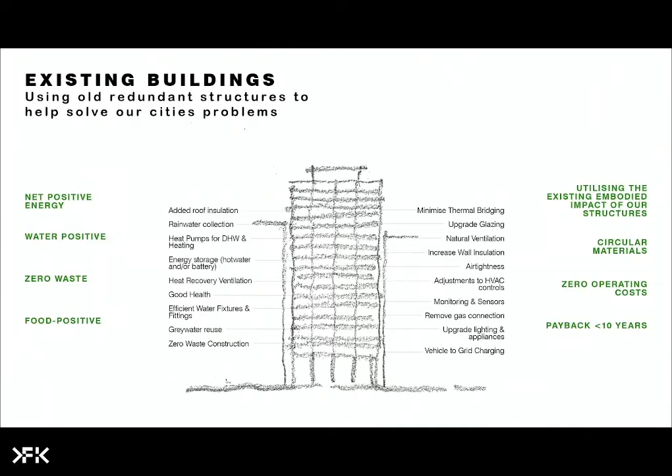This is in Richmond, and it was a silo, 4 silos. But in Richmond, you could not build over 2 stories, and this silo was 7 stories. So by just adding on to it, we all of a sudden got a 7-story building. And we got very interesting apartments.

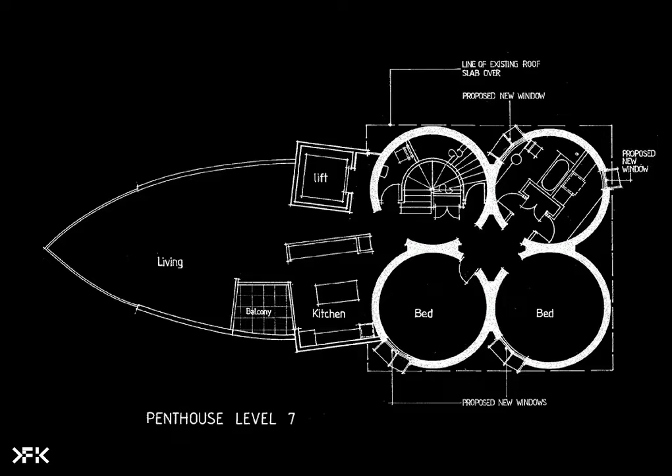It was done by taking the silo forms and adding the eyeball shape onto it, and extruding it up, and it was shaped like this so that the rear neighbours could still get sight lines. We didn't go beyond, even though the site was bigger.

And there it is, and it's a kind of interesting thing to come across, but it's using what we have. And if it had been pulled down and another building put there, there would have been a lost opportunity of memory, a lost opportunity of sculpture, and a lost opportunity of a sustainable approach.

And another one, this is a building that was the old Postal Hall Telephone Exchange in the city of Melbourne, the first taller building that was built after the war. They built them strong in those days.

And so Nonda again bought this in syndication, and we went ahead and put a building on top, 7 stories, steel, lighter weight, and turned it into residential. So offices became residential. There was retail brought down into the Postal Hall. This is in the city centre on the corner of Little Bourke and Russell Street.

And all of a sudden, and I know we had a discussion today over lunch about bringing residential into London, and I was just overwhelmed by all the realities of why that's very difficult to do. But luckily in Melbourne, we have the space and place and opportunity to convert, to get people into the city, and it's quite a different paradigm.

Melbourne closed down. London is such a force. It's got all of that retail and interest and pageantry at ground level. We didn't have that. We don't have that population. We don't have that demand.

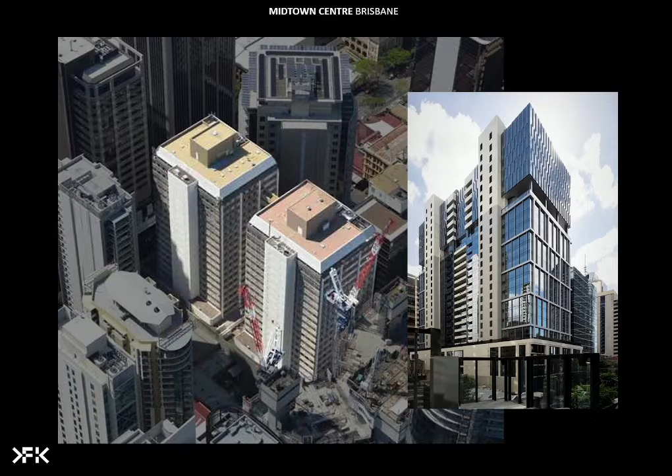We just took everything off the towers and stripped out the ceilings, reclad it with a very efficient shaded glazing system, and filled the void between the two with a mixed mode zipper space, creating from two 900 square metre floor plates, one 2,000 square metre floor plate. So that was a very flexible space, keeping all of that structure, recladding it, resurfacing it floor to floor, mixed mode with ventilation through the building.

And I think we just won a sustainability award through our institute for this building. It's quite a rare thing. I can't think of any other building in the world that's been joined to make one building. But it needs the commitment of clients.

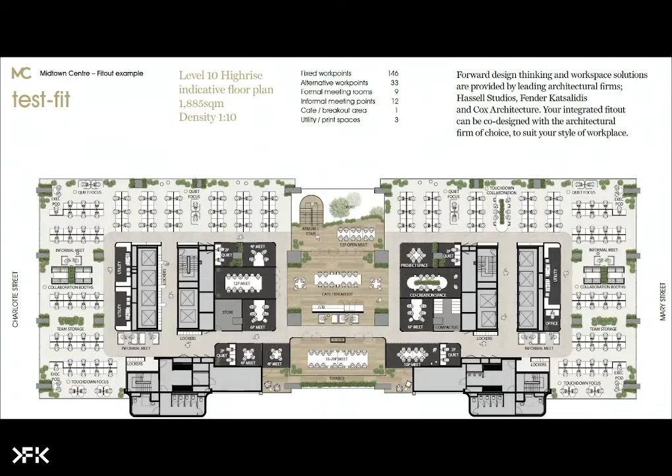So here's a test fit floor. There's one building, and this piece in the middle that is a meeting place, where you can have interfloor connections without having to go to the elevators and all of that. So then there's next generation workspace. And of course, we couldn't resist but put another few floors on top.

Increasing the workability of that piece in the city of Brisbane, retaining the heritage site, creating through-block links, creating gardens in the sky. I feel a bit, I've had to rush through these because there's quite a bit, but each of these projects have got so many aspects.

It is about the livability of buildings, but all of these positives in terms of reusing buildings, it's just something that you can't ignore. And new buildings, producers rather than consumers, so water, waste and power, dealing with that, reskinning efficiently, sealing, batteries, electrifying the building, all of this again to get to zero operating costs and infrastructural payback under 10 years.

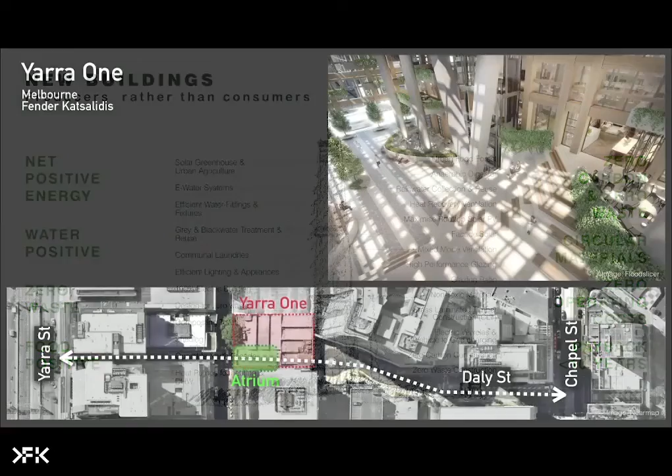But keep coming back to the equitable use of space on the ground floor for the public, the way these can improve the local area and community. So this is a piece of South Yarra, an inner suburban, quite beautiful suburb, but the council had created a pedestrian link from this very busy major retail street through to Yarra Street, which is on the railway. And it just didn't function. There was no reason for people to go there.

It wasn't very nice. So when we developed this piece here, we created a node which expanded the walkway into a place for F&B, for music, for buskers, in other words, enriching the trail. We did that in unison with the council, who said, well, if you do that, if you pay for that, we will allow you some further development rights, because you can do that without any negative impacts on the neighbours. And we did. So these sort of things need the collaboration of council or state government.

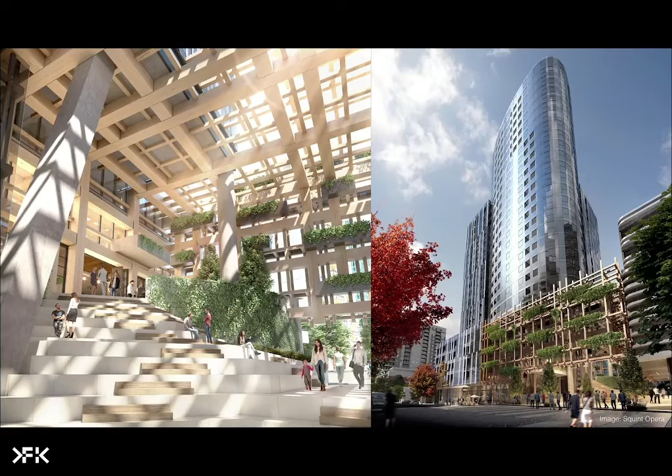The sustainability issues, in the broader sense, are never going to be driven by countries or major national government. It's got to happen through the city, and through the suburban councils, because they can drive it, and they can make arrangements site specifically with the developers. So by doing this, the timber trellis in the street, which has cascading gardens and people, it's space making, place making, and very, very important to the public realm.

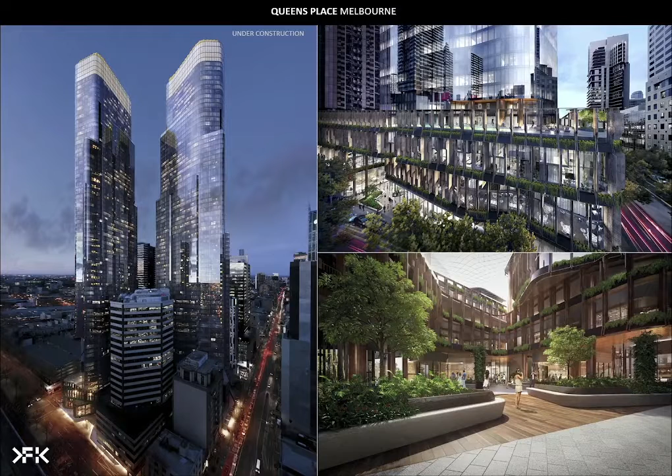Another project in Melbourne, twin towers near the Victoria markets. This tower is now finished, this one's being built, this will be built to rent, this is apartments, very successful. So a range of apartment types, which is kind of equitable. Build to rent has become very strong over the COVID period. And the millennials love it because it's a light touch for them. The leases are easy, they're not big apartments, and they have a lot of communal gathering places. They like people, they like hanging around with computers out there. And so that's kind of an interesting residential offering at both ends of the scale.

But importantly, the podium builds on the tradition of the Melbourne laneways. It's another interpretation of the Melbourne laneway, but it's filled with home studios, retail, F&B, and it just adds another layer of richness to the ground level activities of the city.

And these two buildings, a hotel and an apartment building, right opposite a World Heritage Park in Melbourne, and the park is carried across the road and up through the podium with a ballroom, through block links. And again, this is all about equitable social spaces, and I think it's sort of social sustainability.

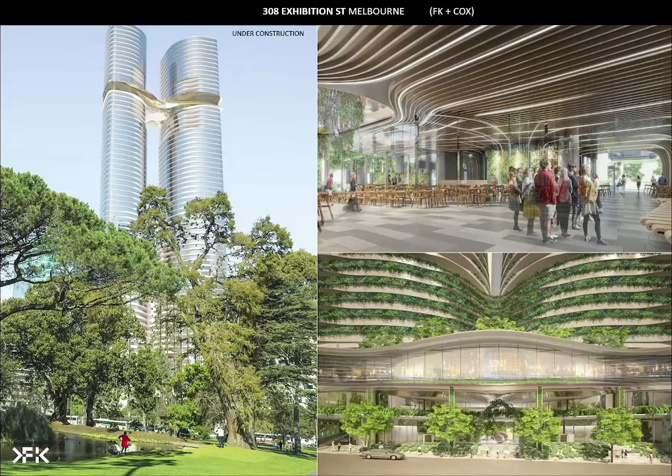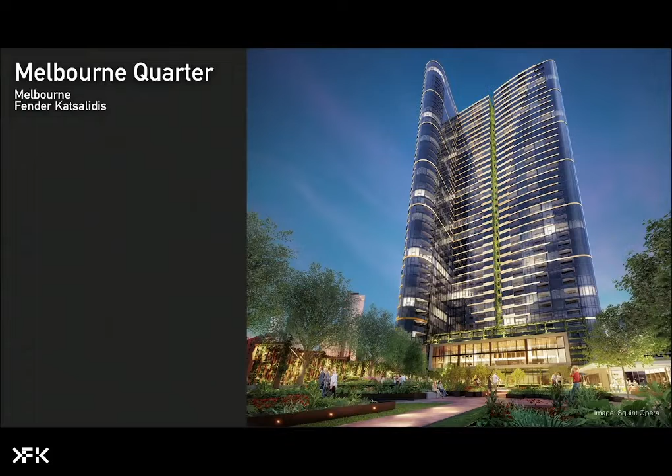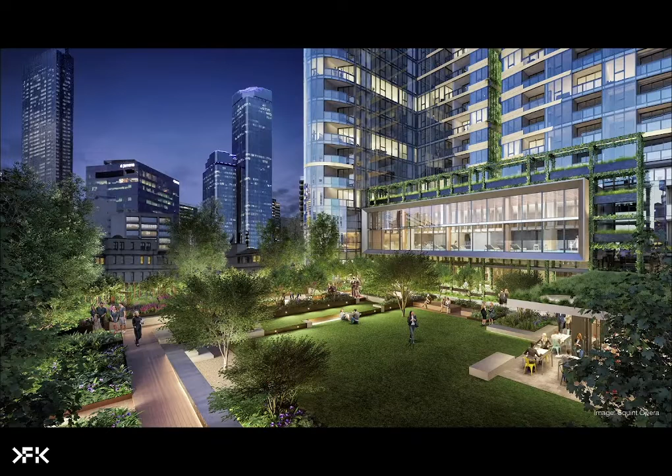Another one, Melbourne Quarter, which is again residential and rental apartments, but all the amenities look out onto a garden. Where's that garden? On top of the car park. And through this garden you get a linkage down to Flinders Street, which is the river, and up into the city centre, which is the business district. So it's making places and spaces for people, for the enjoyment of both the residents and another park for Melbourne, which is based on parks.

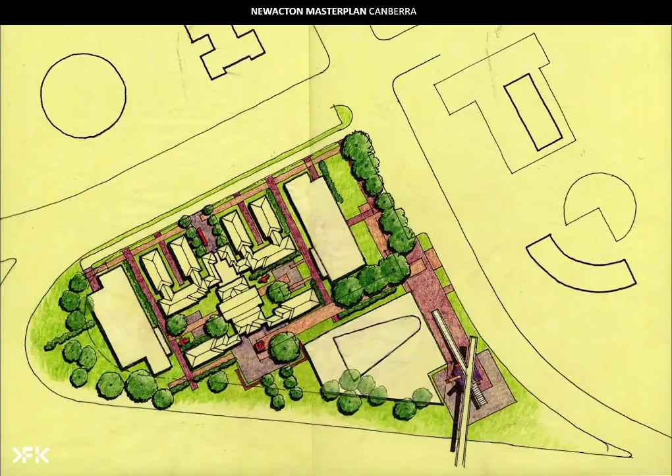This one is in Canberra. It's a sketch that I did at the start of this project, which was all about an existing—I think it was a 50s hotel. A hotel, it was residences for the politicians. Canberra is the sort of political centre of Australia. And then there were these spaces left over for buildings. So it was all about the public realm.

This was called Nishi, which means west in Japanese, and it produced, in Canberra—which was a very elitist place—50 square metre apartments. We went to Japan and found a little group called Suppose Design Office, and we collaborated with them. They did 50 square metre apartments in here with through ventilation, which were like living in works of art, living in sculptures. You know David Umemoto, the sculptor? He's just—well, look him up.

He does amazing sculptures that you kind of want to be in, and that's what these young guys did with us. Importantly, it was annexed to an office building, which at the time was 6-star Green Star—the only 6-star Green Star building in Australia—and it had the largest array of photovoltaics on the roof. It had a courtyard or atrium in the middle, so we got through ventilation. This timber screen shaded the north elevation, and now all of these are planter boxes, so it's got a lot of planting. It reflected light off the blades into the building. It was a very, very sustainable building, clipped onto the residential with an atrium in the middle, and also an entry foyer that led to theatres, hotel, food and beverage, all in this one building.

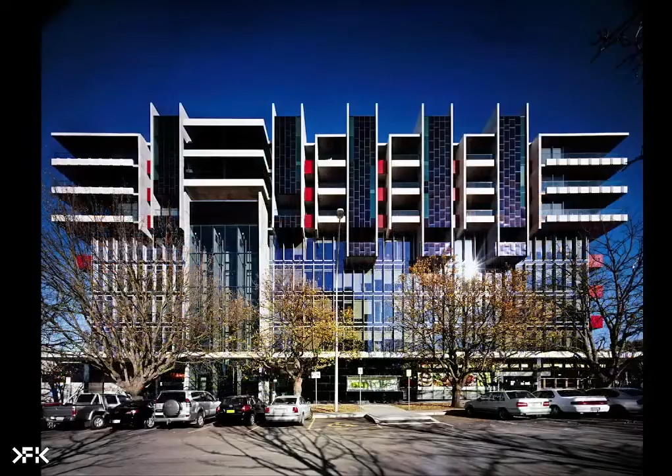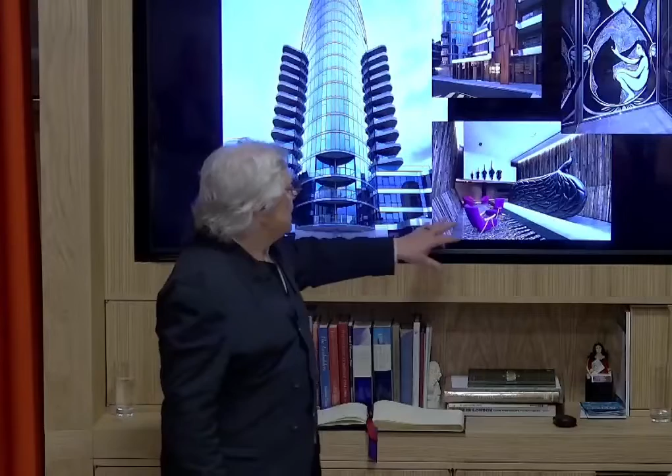And this was the next building, which again—actually this was the first building. This was retail, food and beverage, commercial and residential, mixing the uses, making the building sculptural, interesting, and of mixed use. And this was the tower on the site, which again really worked the urban art—Corten waterfalls, artists designing the lobbies, the elevator ride with a glass wall up a vertical art piece. So again, really concentrating on the public realm.

So we apologised. One of our Prime Ministers finally apologised for the treatment that certain pioneers of Australia inflicted on the Indigenous owners of the land. And now we usually start every talk with an acknowledgement, and on a lot of the work that we do now, we involve Indigenous people and try to get back to the lessons that they are giving us with respect to respecting the land.

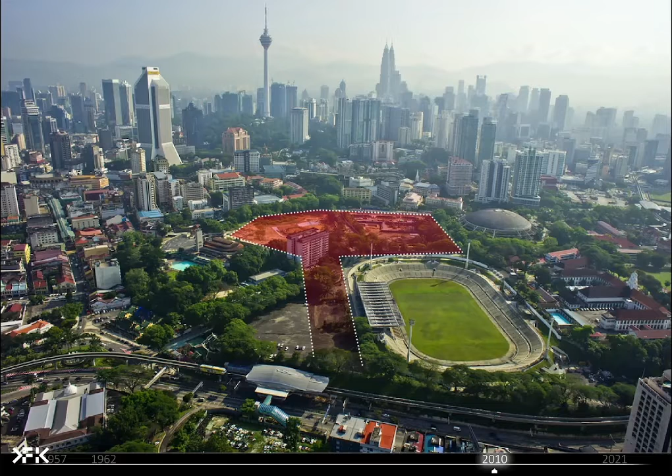I was told I had 6 weeks to develop 6 designs for a tower to present to the Prime Minister, which is a bit crazy, you know, 6 weeks. At any rate, we did, and luckily there were 6 versions in little models, and he picked the one with guidance, which was the one that had to be built, and we were up and away.

So I thought, well, this is actually beyond just designing a building, and it's on a really incredibly important historical site. So there were a few challenges there. And again, I keep taking this back to public realm, towers giving back to the city, however you can do it. This was incredibly important.

There had been a previous scheme by a local firm. It was a village of towers.

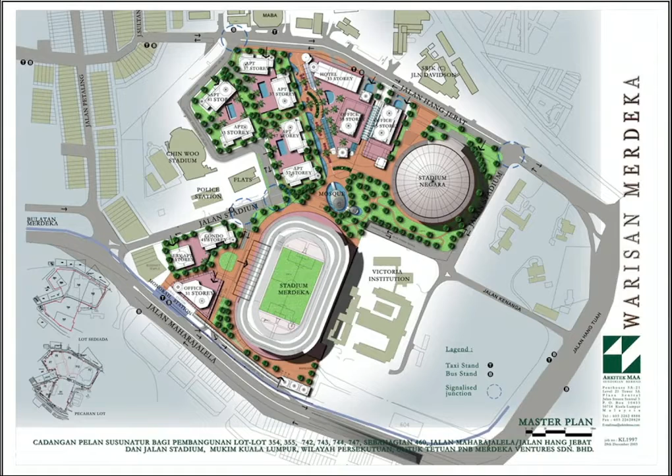It was an even scattering, and there was no public space. It was just a village of towers.

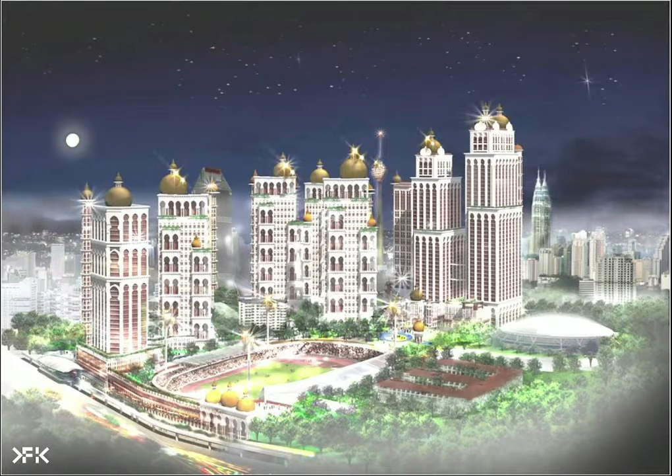They designed it in the local Muslim Malaysian tradition with domes and gold, and that could have been a church or a mosque, then extruded it, overwhelming everything because it's a wall.

So, not to be too critical, the people that bought it, PNB, the largest funds management group in Malaysia, actually wanted to do something to give back more. So they reparcelised the land, and we came up with...

A design of the tower in this location, which was on axis with Stadium Negara, not on axis with this. I mean, you'd love to have put it there, but it was all too tight.

But by putting it here, it created an axis which provided a pedestrian link from Chinatown through the building and down a park that's 200 metres long, almost a quarter of a kilometre, and 60 metres wide, designed through competition by Sasaki out of Boston. So immediately it was starting to talk about public realm, public access, public improvement.

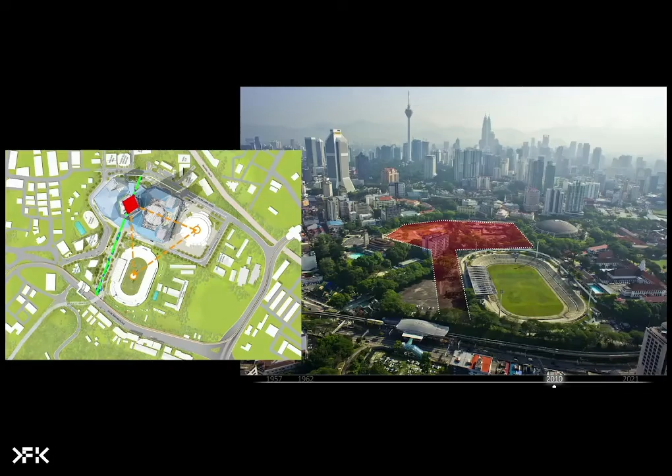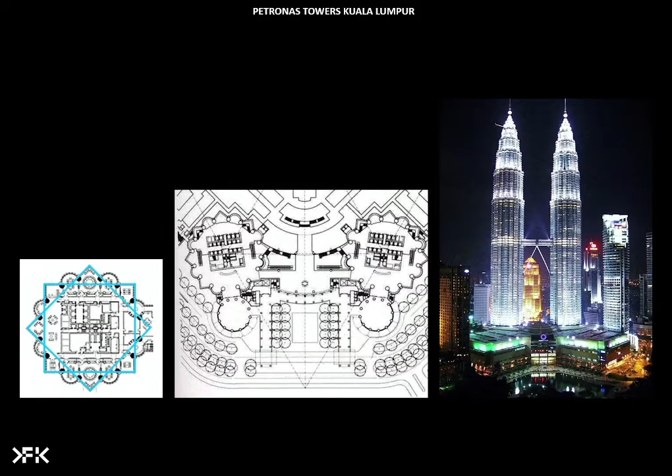Just up the road were the Petronas Towers by Cesar Pelli. Beautiful, beautiful towers, basically sponsored by the Prime Minister Mahathir. And we didn't want to compete.

Based on Muslim pattern and extruded up and incredibly lit at night. So our tower became not that at all. It became a crystalline form.

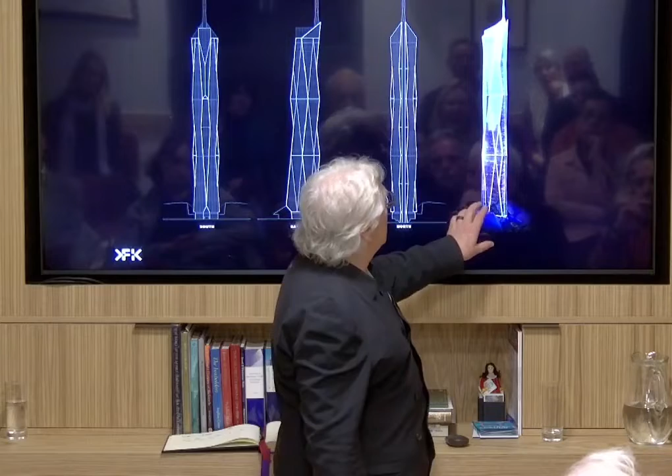Crystalline actually disturbs the wind, so you don't get wind vortexes. It was also, in our mind, crystalline, and by celebrating the folds and the structural pathways, it was all triangulated.

And it was explained to the Prime Minister that the triangles very loosely, or subtly, were symbolic of the very rich cultural sections of the community. It's very culturally diverse and interesting, and this particular Prime Minister was all about the one Malaysia.

So I was able to say to him this is symbolic of all the different people and types and social groups that make up the community of Malaysia, but brings them all together as the one Malaysia, which he bought.

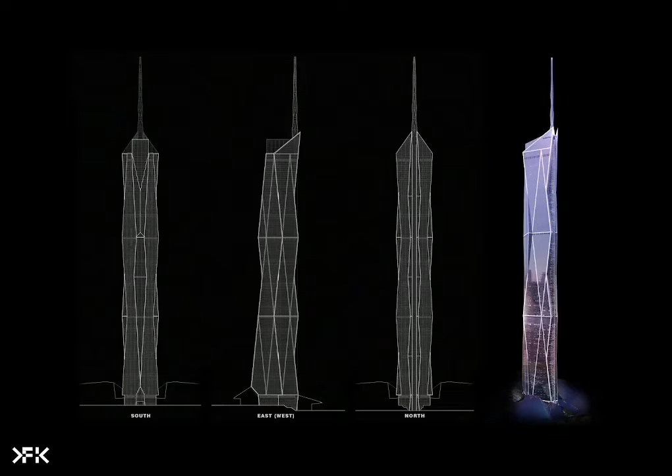But it was also inspired by the Songket patterns in the material, the Malaysian patterns. So that's just one example. But there's a lot of triangles and that sort of thing in both Muslim and local pattern making.

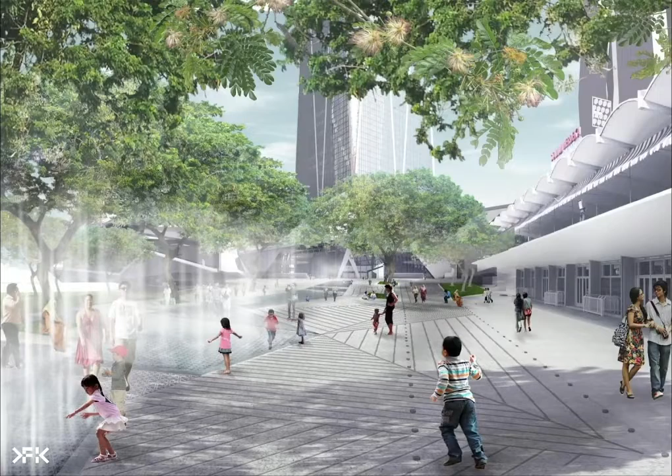And so this is the building as it faces the water park that Sasaki designed. A water park that starts at the tower as ponds, waterfalls, cascades, comes along as what they call the Silver River and becomes eventually a spray.

So the kids can go there, play in the spray, annoy their parents, and that's right on the entry of Stadium Merdeka, which now has a mosque that's been designed and a history museum at the end of it. So it becomes a place of gathering, a new place for the people of Malaysia.

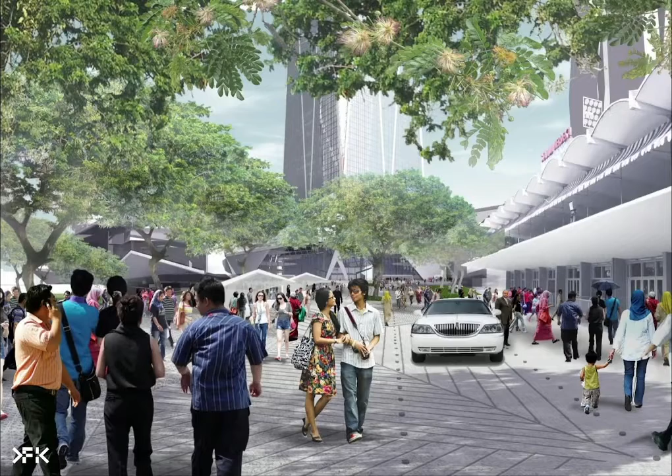And you can turn, if there's a function in the stadium, which there are concerts and all sorts of things, you can turn it all off and you've got a kind of assembly area or a pre-function area in the front of the stadium for the crowds.

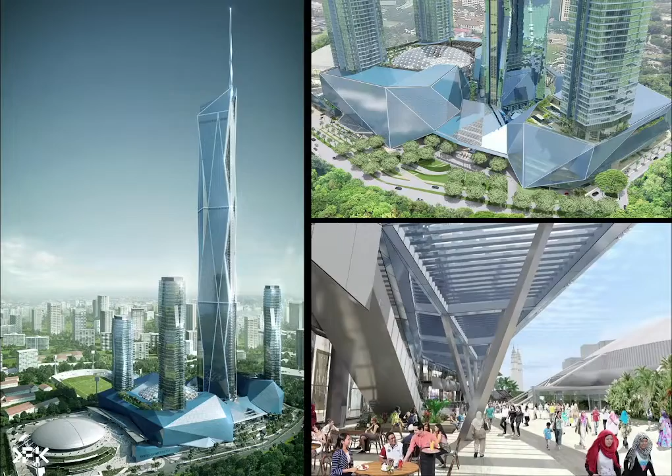It sits on top of, again, a crystalline form podium, which is all eroded around the base, so that in Malaysia, for anyone that's been there, you know it's hot, it rains, it can just come upon you. So many retail podiums just come to ground, and they don't talk about the architecture of the tower above.

The tower is this thing, and then there's a box. The crystalline form obviously comes out of the tower, and it enables people to be under. There's food streets, there's gardens cut into the top or into the roof, which support the activities in these three residential towers.

And within this tower, it's basically commercial, hotel, restaurants in the roof, sky deck, and the ability to climb 50 metres, which is almost a bit more than a third of the way up that spire in a double helix, so that you can appreciate the view without anything around you over KL.

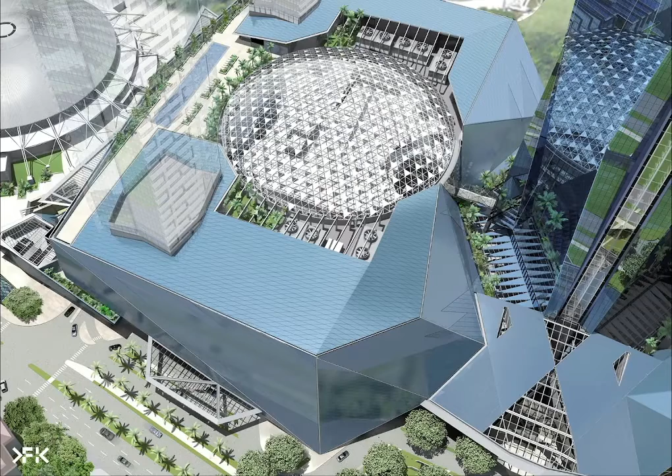This is the dome over the retail, 100,000 square metres of retail, and the dome obviously is talking to the dome of Stadium Negara. But, with retail, it's 6 levels of retail. People don't go up there, so there needs to be something up there that is quite amazing.

The other thing it does is from the retail inside, you can see the tower. If you go into a lot of retail boxes, you have no idea where you are. So here you can see sky patterns, you can see the tower, and it's a kind of majestic space inside.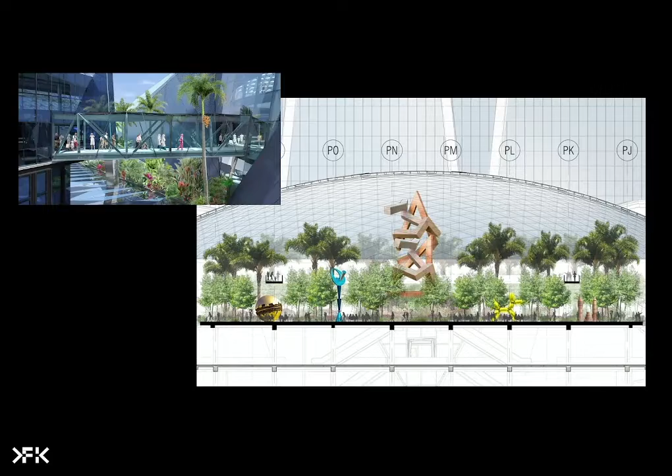When you come down from the sky deck, you traverse across the roof over a garden, and you come into the top level of the retail. That's the 6th level, there's retail down here, and under that dome many things can happen. This is one idea about it being a really luscious art garden.

The tower is a diamond form. So these things are engineering, I guess you could call them masterpieces in a way, of human endeavour.

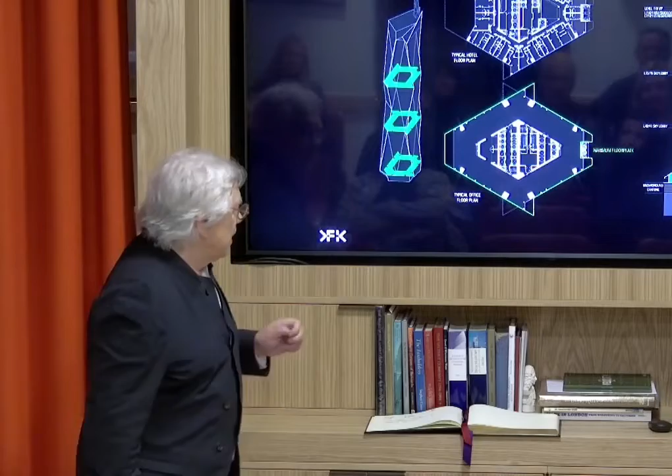There are 3 belt truss zones. So you have a centre core, you have outriggers, which are huge 3-storey trusses that come out from the core and attach to the mega columns. There are 8 mega columns around the building. These big things are about 3 metres by 4 metres. They're a bit like this room, or half of this room.

The belt truss runs around and hangs the floors from the columns, so there are structural pathways. If anything gets taken out, the loads find other pathways down. So unlike World Trade - mind you, I don't know if anything can withstand an A380 flying into it - but for lesser events, maybe, it won't fall down.

You're late. Apologies.

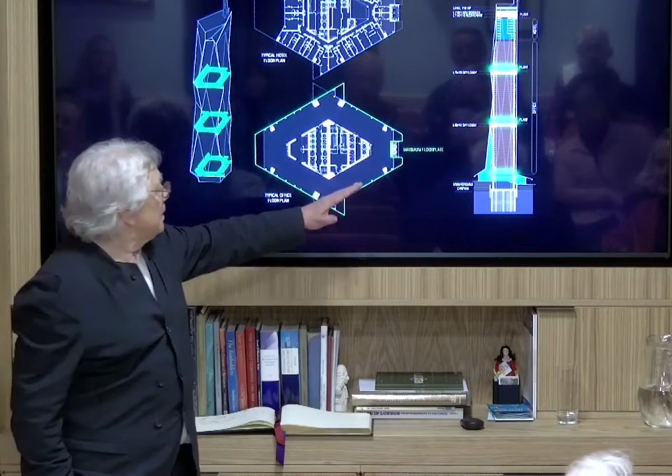There's a lease span of 12 metres, which is an optimum lease span for light to core. It works well for hotel, and it's a floor-to-ceiling curtain wall because the views were so important.

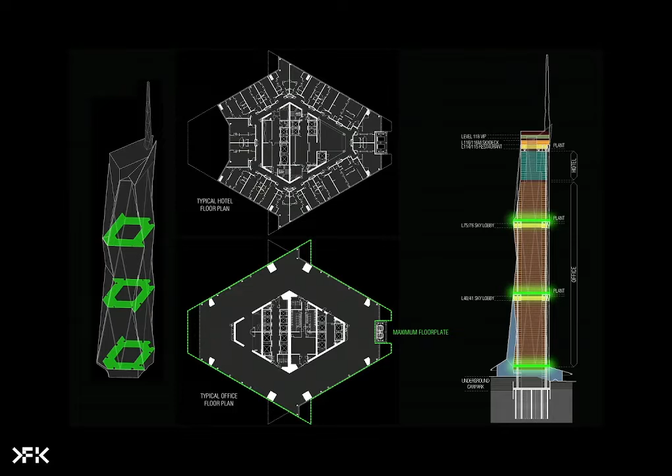But these days we're really talking about shaded facades. This is kind of shaded on the inside because with mega columns, secondary columns, and spandrels, it's about 50% vision glass and 50% not. So it's not as though it's just these huge glass walls - they're very efficient double glazed walls with the outer glazing. They're double glazed, but the outer is laminated glass as well for safety.

So those are the belt trusses, the secondary columns, the mega columns, and these are the humongous three-storey trusses. Now, where those occur, they're the public spaces - they're like the piazzas of the building. So as you go and transfer to get to your floor, they're meeting places.

Now, we talk about biophilic interiors. These spaces have a bit of planting, but really they're spaces about view, about meeting. The biophilic place is on the ground, because we felt that if we could make incredible gardens on the ground plane, that's where people would come. So why would you stay up there looking at a garden on the other side of the glass when there's an incredible view and you could be downstairs in a water park? So we concentrated the nature on the ground where it ought to be.

There's a tremendous move towards the greening of buildings, and I think the work by Woha in Singapore is incredible and fantastic - it's open, so the gardens are on the pathways and you touch and feel the planting, and that's a terrific thing. But in this case, it's an office building, not a hotel, and so the idea of the social places is where you transit, where you meet, where you wait - it's a different kind of order of priorities.

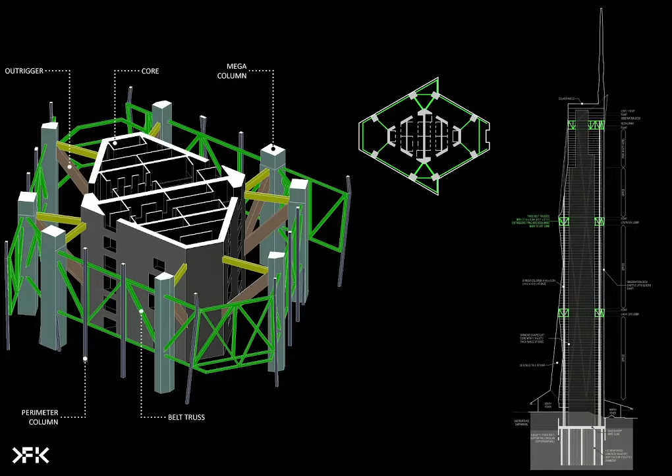So there's more than one way in, sort of, to the interior of these buildings. This is the sky deck. If you're game enough, you can get into these double-storey elevators and fly up the outside of the building at 9 metres a second and get to the sky deck.

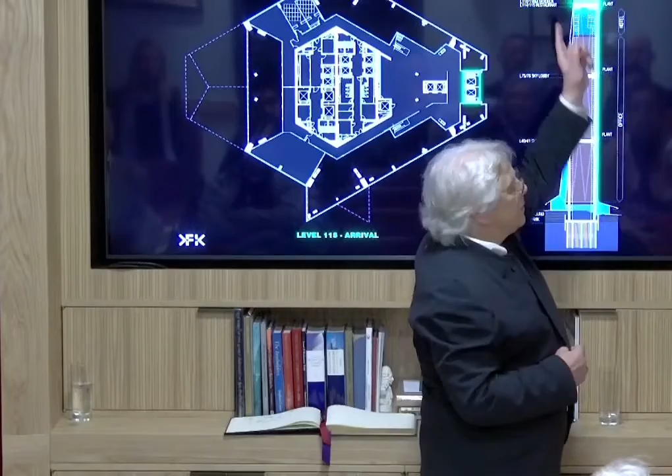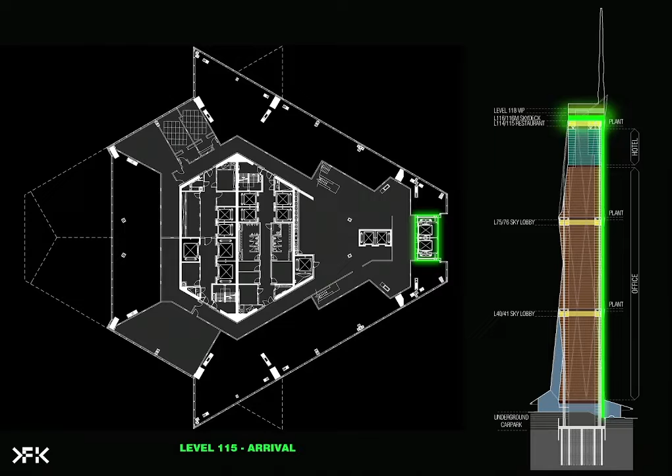And then if you're really game, you can climb up into this spire - I've done it, it nearly killed me. Malaysia's hot and it's humid and it's wet, and I've been to roof gardens where I step out and think, I can't do this, I've got to go back inside. So that's why we concentrated the garden outside and had a microclimate with water.

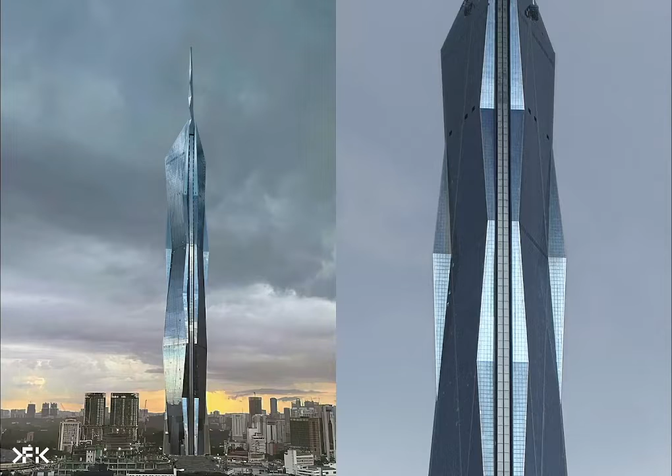So this is the building now built. These are actual photos, not renders. This is the north elevation, and that's the elevators up here. Two double stories - top story delivers to sky deck, bottom story delivers to restaurant. You can see the folds and whatnot.

So again, it's a crystalline form because it changes wherever you look, as it's reflecting differently - it's an object rather than a reflection. So bird strikes are not an issue because they're clever enough to know that's not sky, unlike if it was just flat glass. And it's not on a flight path.

Now, am I doing okay? I'm getting close to the end. Is everyone okay? We're just worried about the food as well, but don't worry about that. How long has it been? No, you're all right, you're fine. Okay, I'll be about another 5 minutes, I'd say.

So it's got two lobbies, one onto Jalan Hang Jebat, which is where Chinatown is - it comes in, there's sort of 30-metre spaces, it comes up, escalators to an upper lobby with a 30-storey atrium, which is all about dragging air through and exhausting air, getting air current through there.

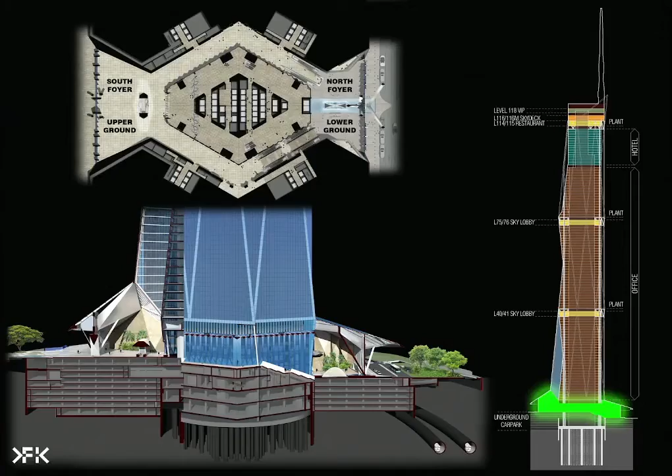And this is the garden and the water garden down here. So this is from Chinatown, arriving by car - often you get into an undercroft and have no idea where you are. So the undercroft is opened up so you can see the building. You always know where you are.

But what would you do? You're all architects - what would you do inside for a lobby? Just to design a lobby inside this thing. I like the idea of having open skylights - yes, definitely. That was carried into the lobby, and we loved the Malaysian Gomantong caves, with light emanating from above, water on the walls, a sort of randomness and structural nature to it, and so the interior became something like that.

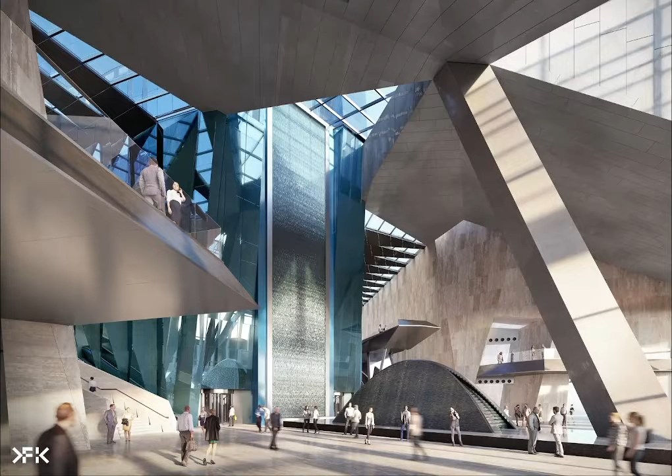All of the interior is travertine stone, and this is a giant lobby that has the hotel lobby on one side of a water feature, and it has a water cascade coming down the face of the elevators. So when you start in the elevator from down here, you're behind a water wall, and then you emerge through the roof to the view - it's all about the theatre and the curation of the event.

But also, I demanded that the hotel didn't start for them in terms of interior design until they got up to the elevators. So this became one piece, not the Park Hyatt entry with all its livery and a change in total feeling - but they get the benefit of the volume.

And this is the side where you go up into the upper lobby with F&B and a place for photographers, and the tower core comes down like a stalactite, inside a stone environment, and that's currently being clad.

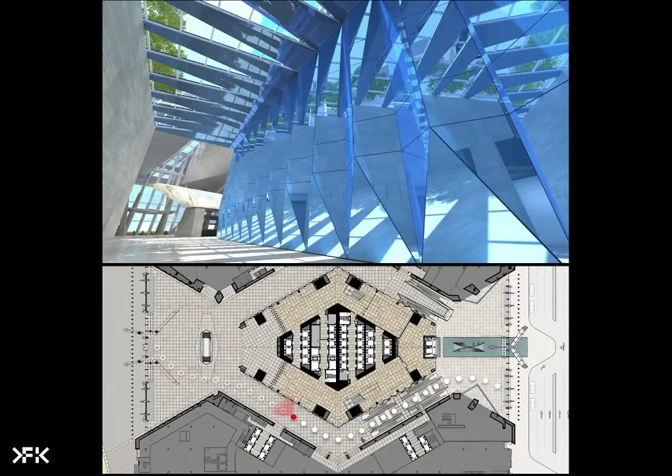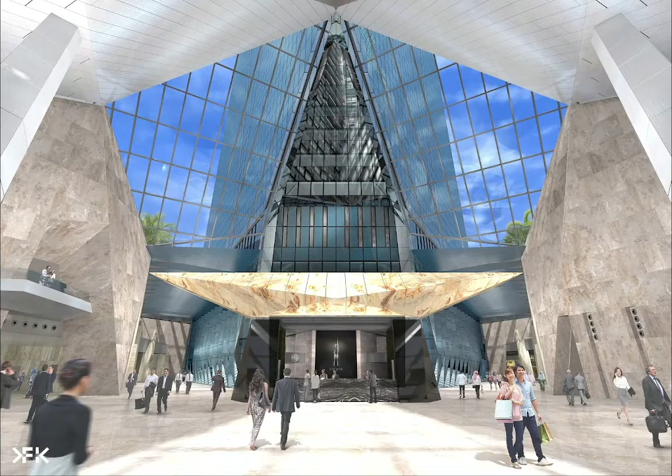And as you come up here, up the escalators and through here, you start to arrive at the upper atrium - you arrive in this space. So we've come up here, turned around - that's the 30-story part of the atrium. This is the information kiosk, which we called the Manenka Bar - it's a kind of tribal hat, and looks like that.

It's backlit onyx, and everything else is travertine. And this is the entry, the secure entry into the building. But anybody can go through here.

So this is a sheltered pathway from Chinatown to the garden and to the monorail beyond. So we're very, very concerned about this building not being a private realm, but being for the public - with certain securities, but anybody can come up here and pass through. They can get to the retail, they can get to the sky deck, they can get to all sorts of things.

Now, as I close up, I just wanted to say that these things have huge budgets. This was 3 billion ringgits just for the tower. With that sort of budget, there's room for these buildings to really give back infrastructure and public realm, etc.

What you're looking at here is road tunnels to bring cars, because it's very congested with cars - they love cars. We had to provide 8,000 car parks. Can you believe it? It's obscene, but it's regulation. I only hope that one day, when they get sensible and get petrol cars off the road, that a lot of the 8 basements full of cars can be used for urban gardens, or for electrification and electric vehicles, etc.

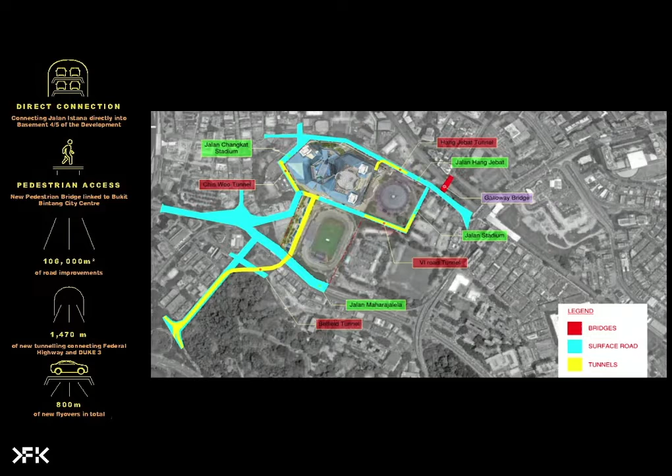But anyway, at the moment there's kilometres of road work to improve the road network, tunnels to get into this car park. There's a new MRT station underneath the retail that's coming. I didn't believe any of this at the start when they said, oh, we're going to have to bring a subway, a railway station, this or that.

I thought, yeah right, in Melbourne that's a 100-year plan. It's all done, it's amazing. Pedestrian access, overpasses, and that's where these buildings have a responsibility. When you've got an enlightened client like PNB, they couldn't be seen not to be giving back.

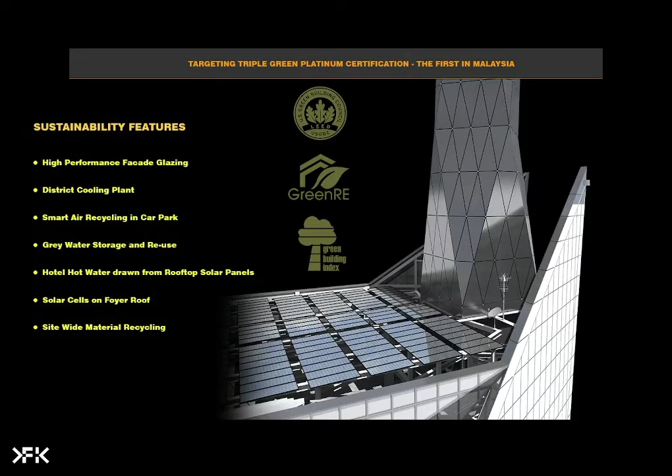That is about social sustainability, and of course that sustainability's moved on from when we started. There's all sorts of new products, methodologies, etc. This is a LEED Platinum building, a high level, high rating of sustainability, done in a whole bunch of different ways you'd all be familiar with, but that's just taken for granted. The building changes, again another characteristic we like - buildings as sculpture rather than just extrusions.

Which look the same from wherever you look at them. The Petronas towers are really beautiful because when you see them and walk around, they change - the positions change, you kind of know where you are. This to me is about triangulation, because if you see this building with Petronas and the KL Tower, you know where you are in KL, because it's easy not to know where you are.

So it's a statement of history, it's a statement of the future, it's a statement of giving back to the community, it's a statement of sustainability, and it's a statement of confidence in the future. And as you look at the tower from different aspects, it changes.

This, I think, is my last slide. What I really love about this is, without prompting, the people in Malaysia who said, oh this is ridiculous, blah blah blah - now they say this is very beautiful, looks like Tunku Abdul Rahman on the day that he lifted his arm. So they see in this a symbol of their independence.